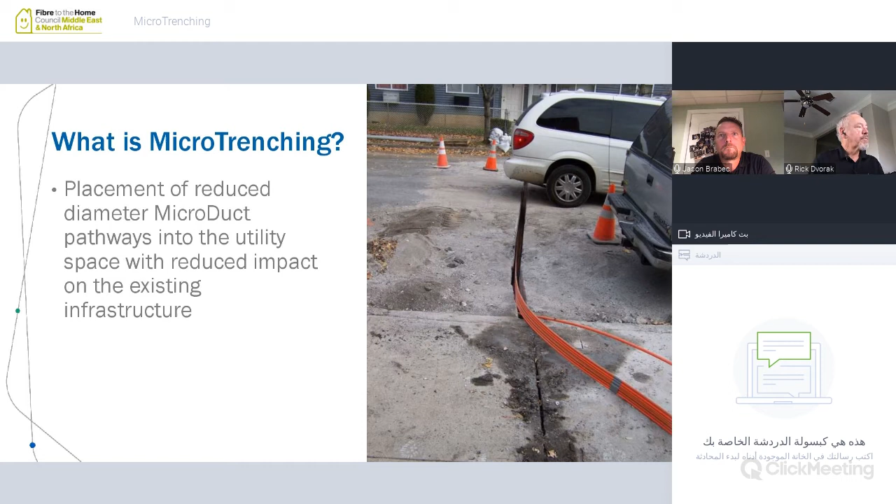So after a typical microtrench, you can drive over it. You don't have to close the traffic down for days. You don't have to come in and do what we call plating, putting steel plates down to protect a trench while you open the road back up in the evening. It's just a lot less intrusive. So, all right, Jason.

So, the physical idea of a microtrench, basically it can be 13 millimeters to 76 millimeters wide, or up to 61 centimeters in depth. It just depends upon what the agreement is, the requirement from the end user and maybe the municipality. Municipality may say, no, I want it at 40 centimeters depth. I don't want you to go any deeper than that.

One thing about working with the municipality, you have to get their approval. In Europe, there's a lot more microtrenching. It's been going on for a lot more years, and so it's more commonplace, but still here in North America, end users have to work with the municipality, whether it's the state or the city, to get an agreement saying, this is what our microtrench is going to look like, this is the material we're going to use to reinstate the trench after the microduct has been placed, and this is what we want it to look like.

And there's a lot of things that you have to work with the city on. If you don't, they can come back and say, no, you didn't do this right. You didn't do this correctly. Tear it all out. And you don't want that. So you want to make sure that they are on board and they're happy with the installation when it's all over. And that's what we're going to talk about. All right.

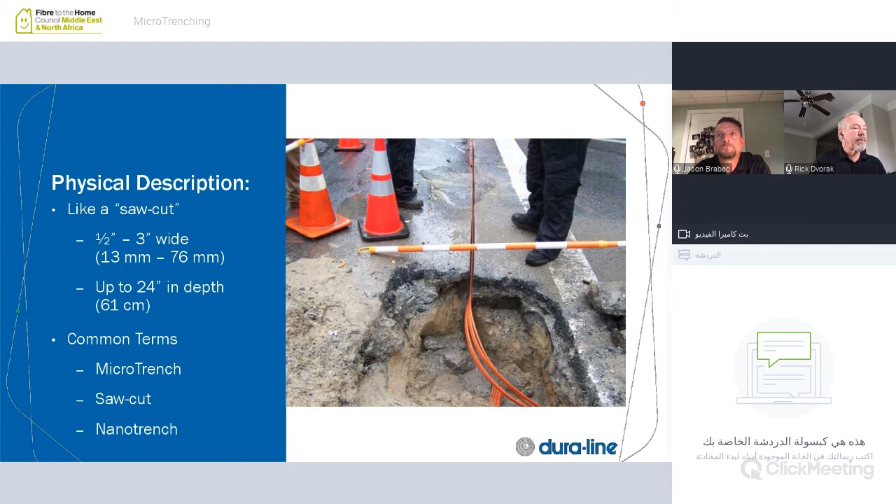Where can microtrenching be used? Just about anything you can imagine. There's a lot of different reasons to place fiber. Everybody knows those reasons, but you can use it for just about anything. And where can you use it?

Some microtrenching is done behind the curb. Some is between the curb and the roadway. Sometimes it's right down the center line of the roadway. It just depends, again, on what you've agreed to with the municipality. All right.

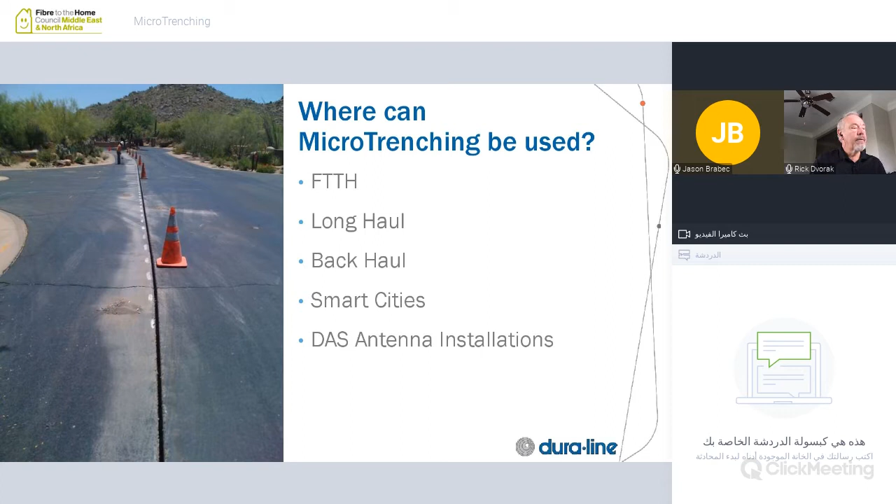There's always going to be a requirement for a certain amount of cover that you need over the top of the microducts. So if it's 20 centimeters of cover, final grade, then you have to figure out how deep you're going to go and what product you're putting in the ground. Again, we have flat configurations with an oversheath.

You can put an individual microduct in a trench. That's kind of costly. I would always recommend at least a backup pathway, but there may be a requirement for just a single microduct, and it can go right to a residence or a business, and that may be all you need for what we call laterals, branching off of a larger microduct system. And then we also make custom designs as well. It depends upon what the customer's requirement is.

All right, you can move to the next slide then. All right. There you go.

All right, so there's several steps, obviously, in any kind of a job. The planning phase, besides determining the route, depth, and restoration, you want to make sure that the municipality knows what you're planning to do or what you're wanting to do.

I've been on several visits with different cities and just talked to them about microtrenching, explained what it's about. And they have hesitation sometimes, as any city would have. But after they see the installation and how clean it was and how low impact it was for their community, a lot of them approve it as an alternate method of installing fiber cable.

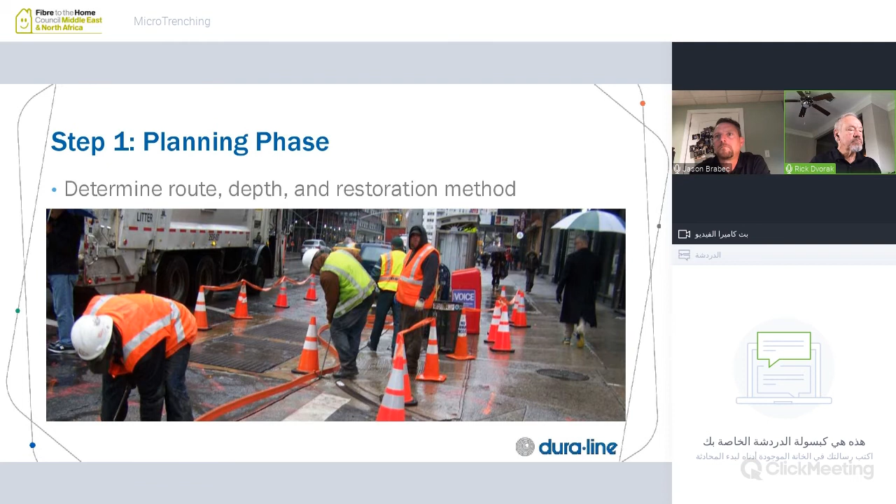The trenching phase, there's different equipment out there. In Europe, they have Marais machines. That's very popular. It's a French-made machine. Here in the United States, we've got Ditch Witch and Vermeer primarily. I know of a couple contractors that have purchased Marais here in the U.S., and they're using those to good effect as well.

You want to make sure that your route is as straight as possible, and that's no different from any other installation, right? Especially if you're jetting cable. MicroDuct requires the installation by jetting method or blowing fiber into the MicroDuct. Those cables aren't really as robust as conventional cables, so they cannot be pulled. So you have to try to keep it as straight as possible. Straighter and the least number of bends is going to improve your distances. That's just standard whether you're pulling cable or jetting in cable.

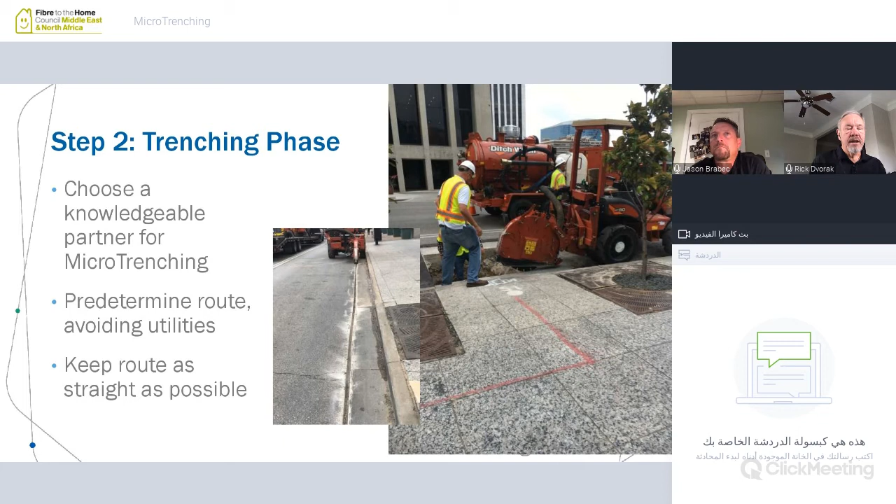This is a typical setup for microtrenching. You've got a vacuum truck in the front. It collects the spoils, okay? The saw blade in the back is rotating and is set to the depth and width of whatever trench you're trying to put in. If you've got a 12 millimeter microduct you're trying to put in, you can't go narrower than that, obviously. So you have to have a little bit of room so the HDPE microduct or FuturePath falls into the trench easily enough, and that you've got room for the restoration material.

A little bit about the restoration material. You want to make sure that there's two things. It's got to be flexible like the roadway, because the roadway flexes with heavy traffic, and it also has to adhere tightly to the sides. You don't want a lot of water ingress.

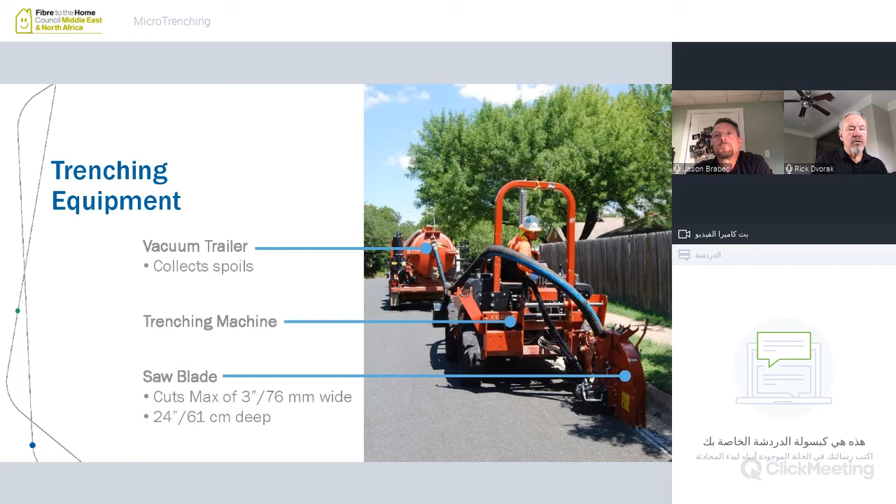Maybe not in your region as much, but in northern climates, there's a thing called frost heave. Frost heave is where it gets down below freezing and water has snuck into the trench. It's gone into the trench alongside the reinstatement material because it's subpar. It's not what we would recommend. So water gets in there, it freezes. As we all know, ice will expand. It actually pushes the reinstatement material out of the trench and causes problems.

Pedestrians, bicycles can get caught in that trench after the reinstatement material gets pushed out. So you just have to take that into consideration if you're installing in a region that typically in the wintertime gets freezing temperatures. You want to make sure that you are using a better reinstatement material, one that adheres tightly to the sides of the trench.

Okay, pathway phase. You want to make sure that your route, the trench, is cleared of moisture and cleared of any kind of debris, so that your pathway lays flat and smooth in the bottom of the trench. Okay.

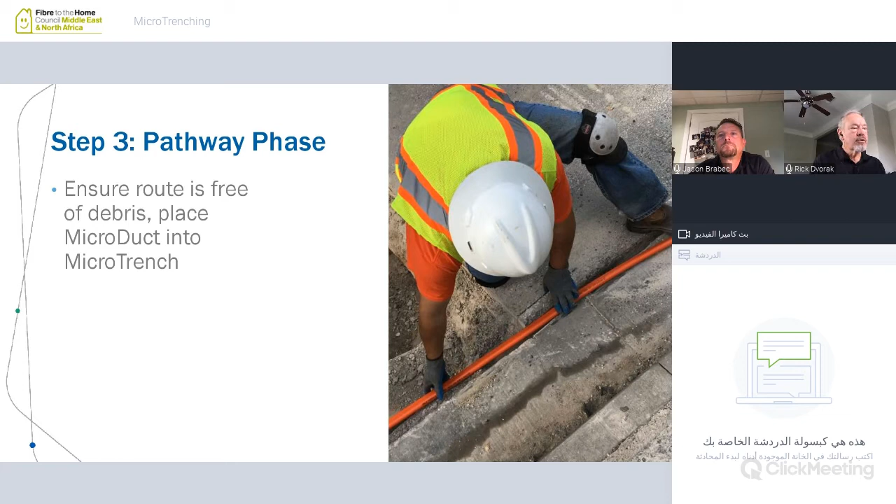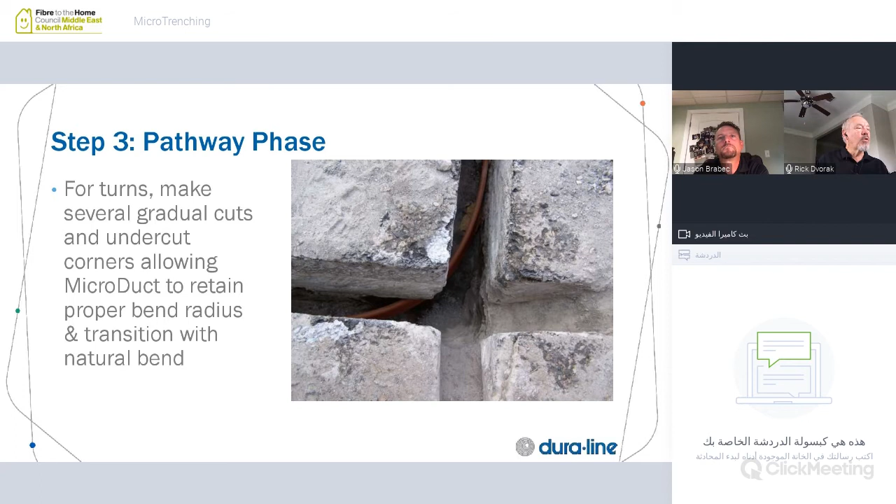For turns, there's a couple ways to complete turns. You can undercut, like this picture shows. You notice it's got a sharp point on the actual pavement, but they have actually dug around underneath that pavement or sidewalk to make a smooth transition, make a nice bend. The other way is to actually perform a cut, a 45-degree cut at that corner, so that you're making two 45s instead of a sharp 90. MicroDuct's not going to bend like that. It's going to kink if you try to bend it at a 90-degree angle.

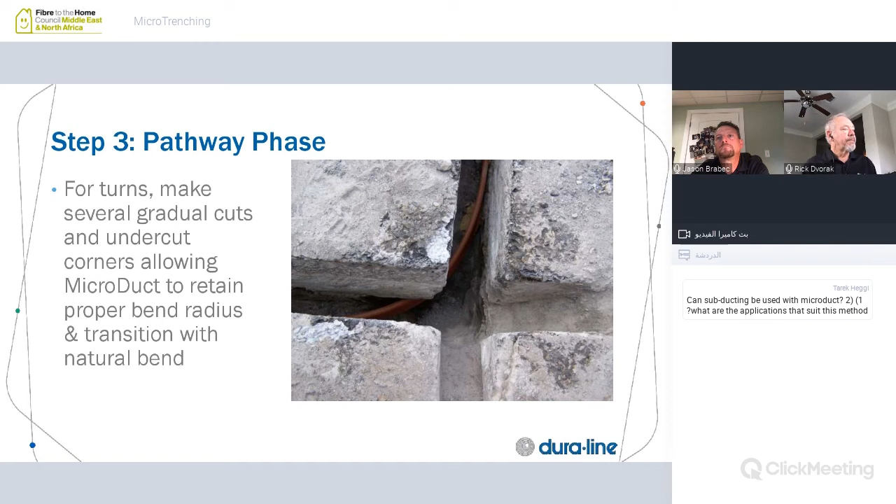So prior to reinstatement, and reinstatement is just the top level, what people are going to see and what people are going to drive over, you want to make sure that you've got it insulated. If you're going to use a hot bituminous mix to reinstate the trench, you want to make sure that the microduct is insulated. At about 248 degrees Fahrenheit, the microduct will start to soften.

A hot asphalt mix or a bituminous heated mixture could be as much as 400 degrees Fahrenheit, and that doesn't mix well. So you have to insulate it in some manner, either with a foam backer rod that's made for that, it's heat resistant, or 1 inch of sand is sufficient. Sand has got a very good thermal K value, they call it, and it'll protect that plastic below it very well.

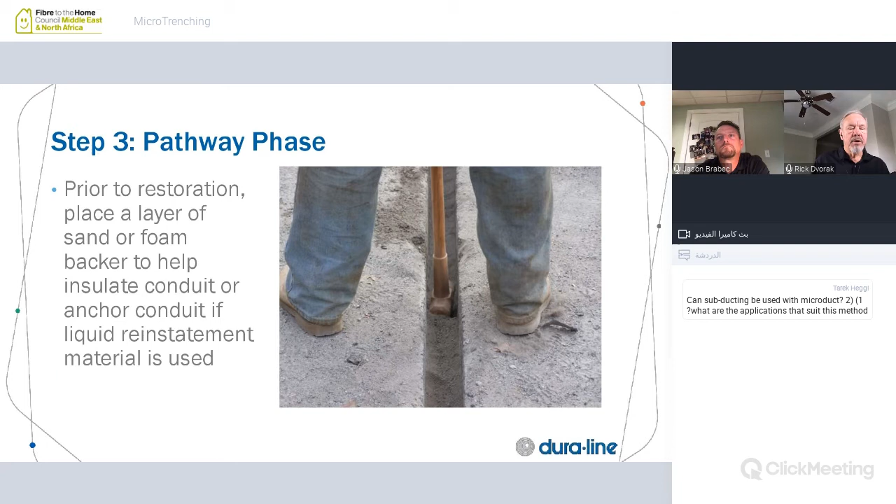Here's a product that doesn't heat up. It's a two-part mixture. It's one of our favorites here in North America, and it adheres very well. It's very flexible. If I had a small disc of it, I could flex it enough, and you could see that it'll flex just as well as a roadway, but it's very strong. We've used it a lot in North America and it works well. There's other companies that make similar products.

So I'd say in the end, you want to make sure that your reinstatement material is high quality so that you don't have a failure there. Like I said, failures with your reinstatement, there's concrete mixtures out there, or just plain concrete. It's not going to necessarily adhere to the walls of the MicroTrench very well. So it could crack, it could come out in pieces, and then you've got problems. You've got maintenance issues, everything else. So you don't want that. All right.

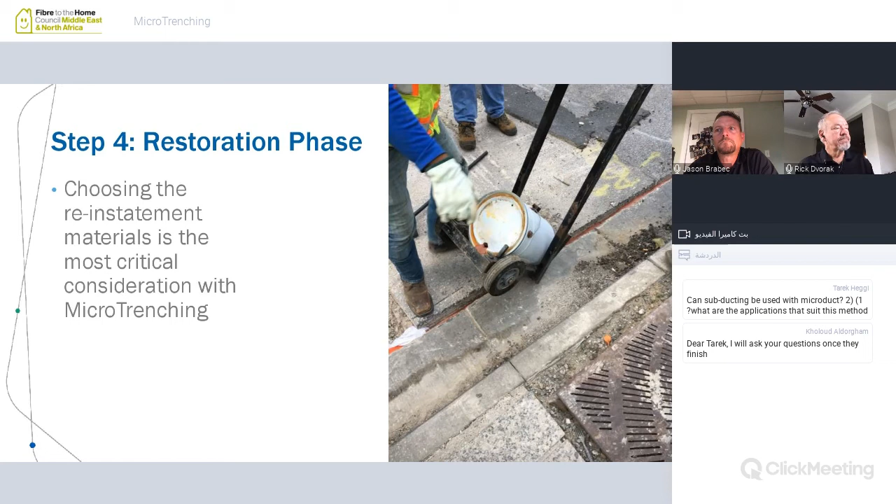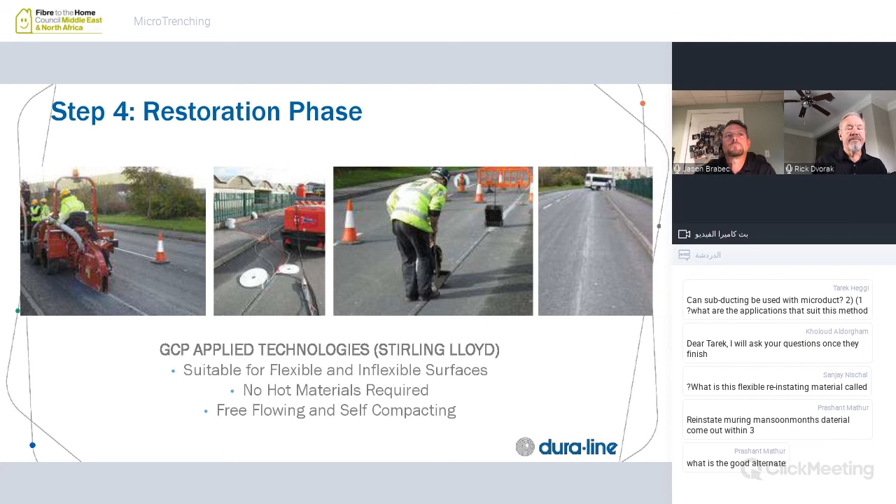And the restoration phase, again, that's what I've been talking about. After you've dug your trench, installed your pathway, whatever it is, you want to make sure that you've put in a product that's going to last. And it's got to last at least 5 years. And you can try different products. There's several different companies out there that make really good stuff. And if you want to do a field trial in one of your facilities, you can do that, just several meters. You can try it and see what you like, listen to their sales pitch, etc.

So here's another company, there was one back here. GCP Applied Technologies was one. Let's see, right there. All right, that's one that we like here. There's sealers and additives that they can put in and basically mimic the initial road surface before there was any cut. And you can see on this far right side, they've added some colorant basically, and you can hardly tell that anyone's been in there to install anything.

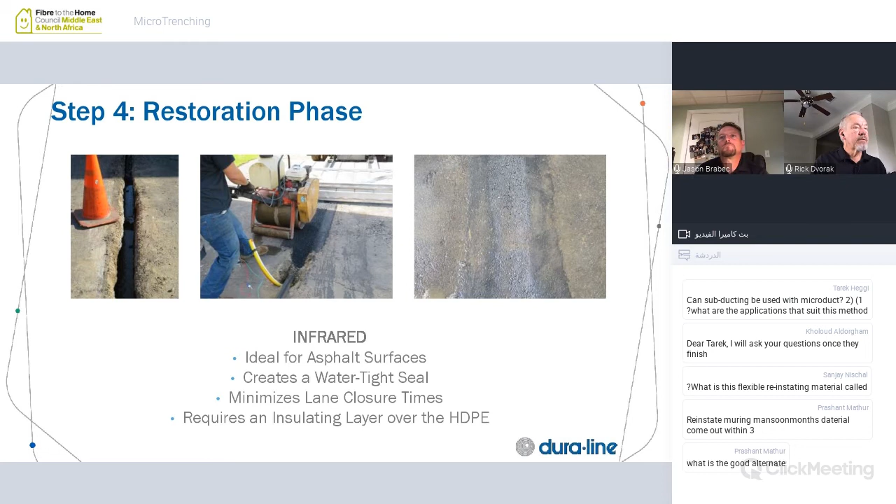We have a company in the western region of the U.S., GST Elephant Armor. Again, they've developed it quite well, and it adheres to the trench and stays in place. I wish I could say that the magic is all in Dura-Line conduit. We like it. We think it's the best thing in the market. But for a successful MicroTrench, it's all in your restoration, okay?

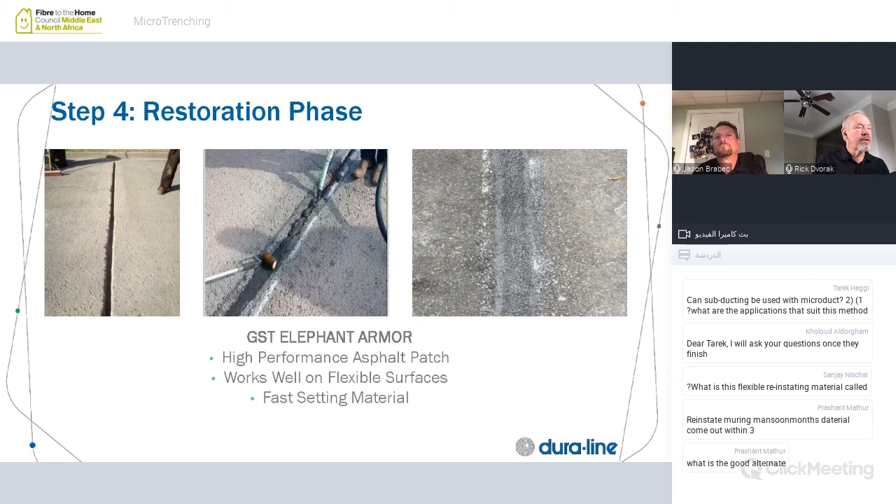And then you've got your fiber placing. There's a lot of different equipment companies out there to place fiber. You can get them to come out and do demos for you. Some of you may already have this equipment in your warehouses, or your installers are using it right now. I'm guessing the latter is probably the case, but there's no difference in doing any kind of a micro installation.

So it all takes high pressure air. The machine just keeps the fiber moving into the microduct. Most of the work is done by the air pressure or the airflow over the cable. So whatever compressor you use is key. You don't want to use a small little electric compressor. That's not going to do it. You probably want a consistent air pressure of 120 to 150 psi or even higher.

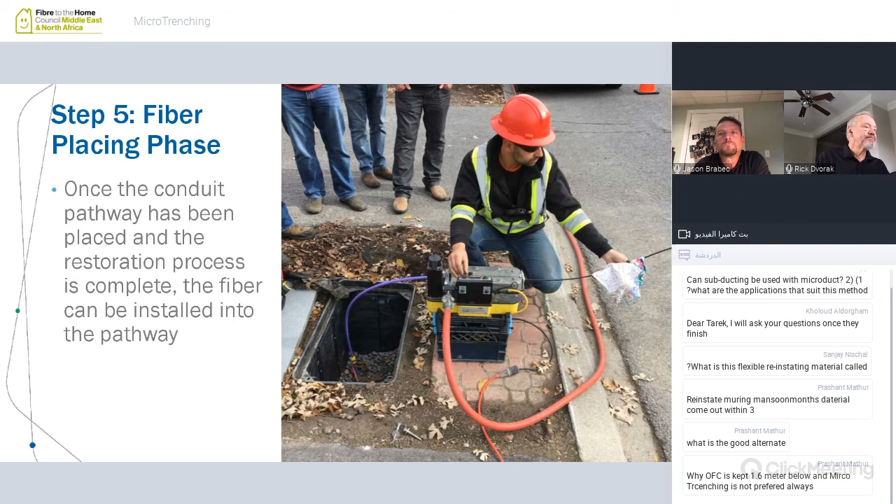Now we have a brochure on microtrenching. Last year we did a microtrenching summit here in the state of Texas, and it was very well attended. A lot of people had a lot of interest in it. Microtrenching in North America has become more commonplace.

When I first started getting into it 12 years ago, it was, oh, nobody's ever heard of this, oh no, we can't do this because it's not what we're used to. It's different. But now everybody knows about microtrenching, and it's a viable application in a lot of cities, a lot of states.

Currently going on, the biggest microtrenching project is about 400 miles in the state of Pennsylvania, where Jason lives. And it's using our products, and it's along a highway. Absolutely. And thankfully it'll be microtrenching, so it won't disrupt too much of the traffic flow.

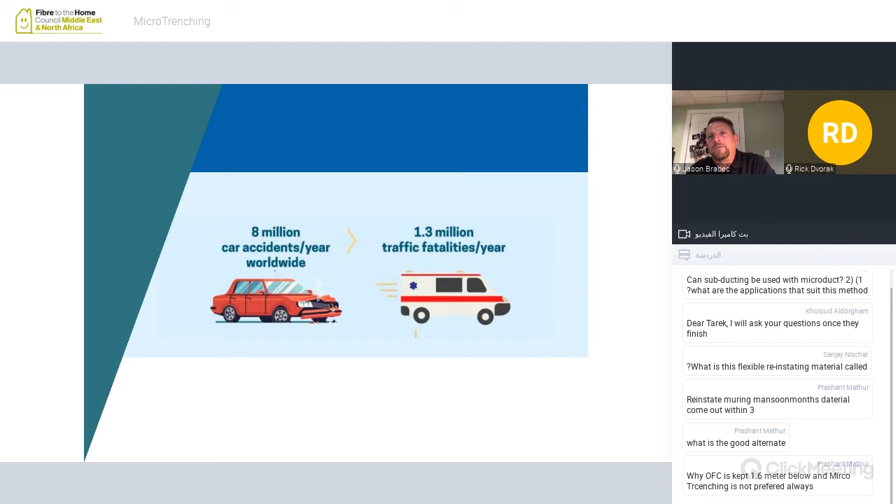All right, that's really what I wanted to touch on. There's a few more slides on my presentation, but some of it is dated. Really, what I'd like to highlight, and I touched on this a little bit here: in Philadelphia, they save about $1 million per year in fuel and maintenance and labor for trash.

So what they did was they hooked up sensors onto their dumpsters, the ones with walking pedestrian traffic. Instead of sending the truck around all the time to check the trash receptacle, it actually sends a signal back to say, hey, I'm 2/3 full, I'm half full, or I'm full and I can no longer compact. Then they send the truck out.

So this has reduced manpower labor hours for the city, and also greenhouse gases and the impact to the infrastructure and the roadway, because everybody knows when a trash truck is going down the small city streets, it does inhibit traffic flow. All right. I think that's all I have right now.

Rick, do you have anything to add? Well, I'd just like to add one thing. There's a lot of talk about self-driving cars and whatnot. It's very interesting that each car that's going to be self-driving, they're estimating it's going to take 7 gigs of memory and communication, probably on a Wi-Fi platform for each car. Imagine a typical highway, what that's going to look like. That's a lot of information passing back and forth between vehicles and antennas.